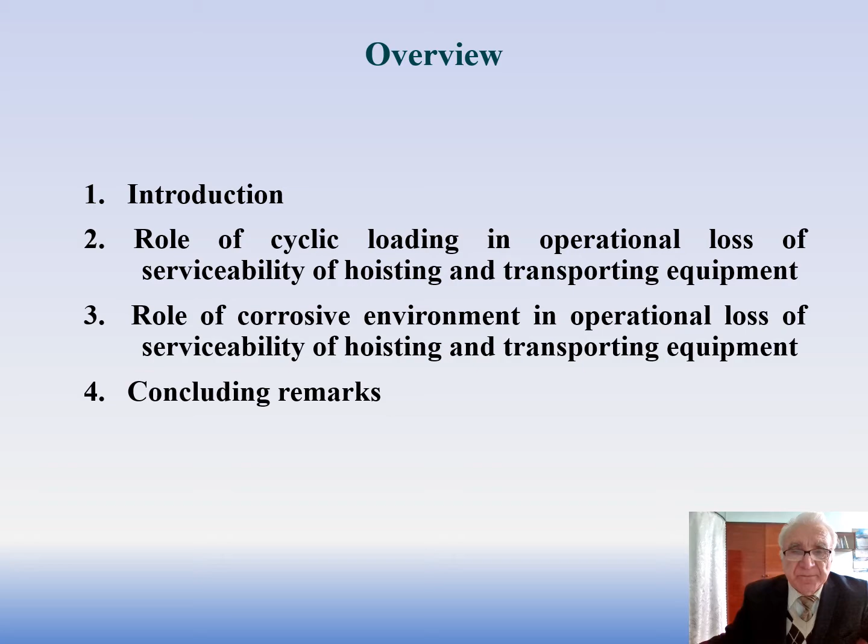Overview of the presentation. Introduction. Role of cyclic loading in operational loss of serviceability of hoisting and transporting equipment. Role of corrosive environment in operational loss of serviceability of hoisting and transporting equipment. And concluding.

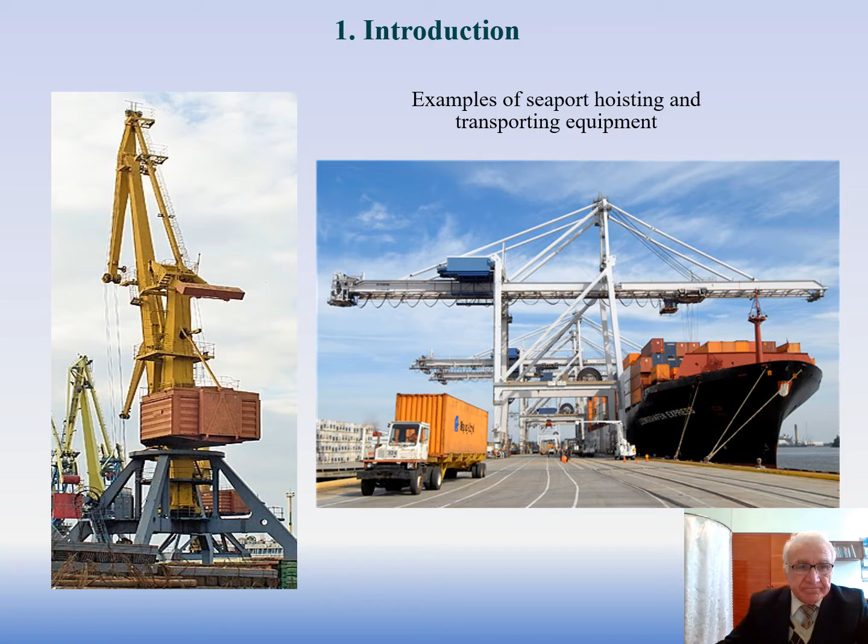Introduction. Hoisting and transporting equipment is an important component of seaport infrastructure. It should meet appropriate requirements for the mechanical properties of the metal, which ensure their serviceability during a planned long-term operation under combined action of cyclic operational stresses and corrosive marine environments. It should be taken into account that the mechanical properties of load-bearing structures of handling equipment are subjected to operational degradation.

Its peculiarity consists in a sharp decrease in the resistance to brittle fracture, and this increases the risk of abrupt rupture of metal structures, including hoisting and transporting equipment, as is shown on this slide. In this paper, the manifestation of two important factors in the operational degradation of carbon steels, namely cyclic loading and marine atmosphere, have been analyzed.

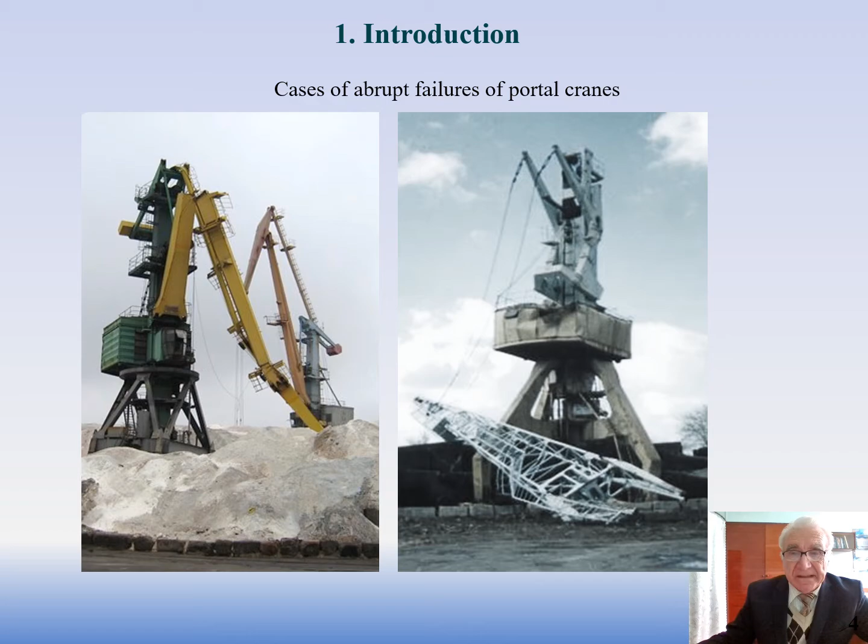Role of cyclic loading in operational loss of serviceability of hoisting and transporting equipment. The stress ranges of certain units of the portal crane, operated for 33 years, had been analyzed. The measurements were done on the surface of the crane under conditions that corresponded to its normal operation using the strain gauge method.

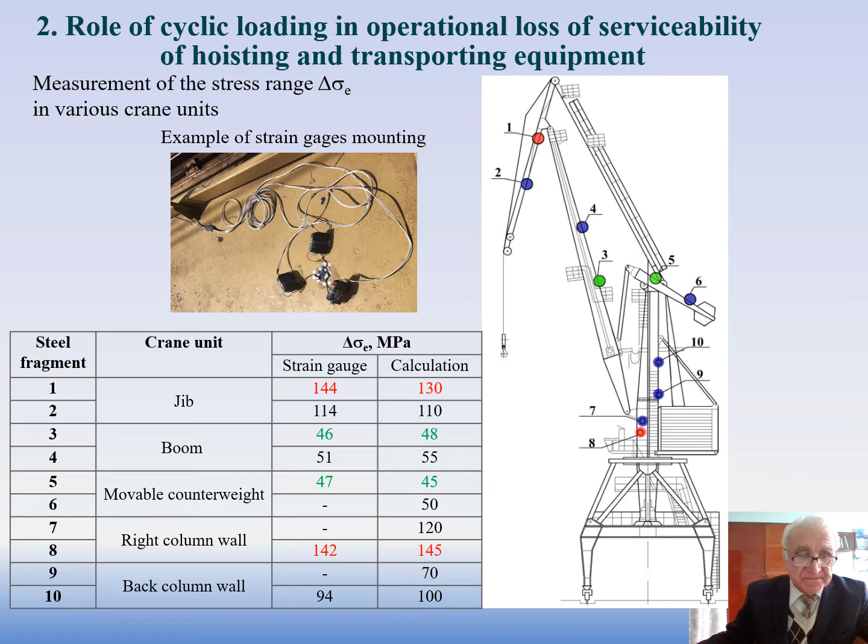This made it possible to evaluate cyclic loading, stress, and most importantly, the difference in their levels for the test crane units. As expected, the value of cyclic stresses to which the crane components were subjected contributed significantly to the intensity of the degradation process in them. A comparative assessment of in-service stresses and the corresponding resistance to brittle fracture for each unit is presented in this table.

A relationship between the obtained values of stress range and impact toughness has been established. The higher the stress level, the lower the resistance to brittle fracture. In addition, it was shown that delamination along the rolling direction accompanies the drop in impact toughness. This results in different KCV values for specimens cut longitudinally and transversally to the rolling direction.

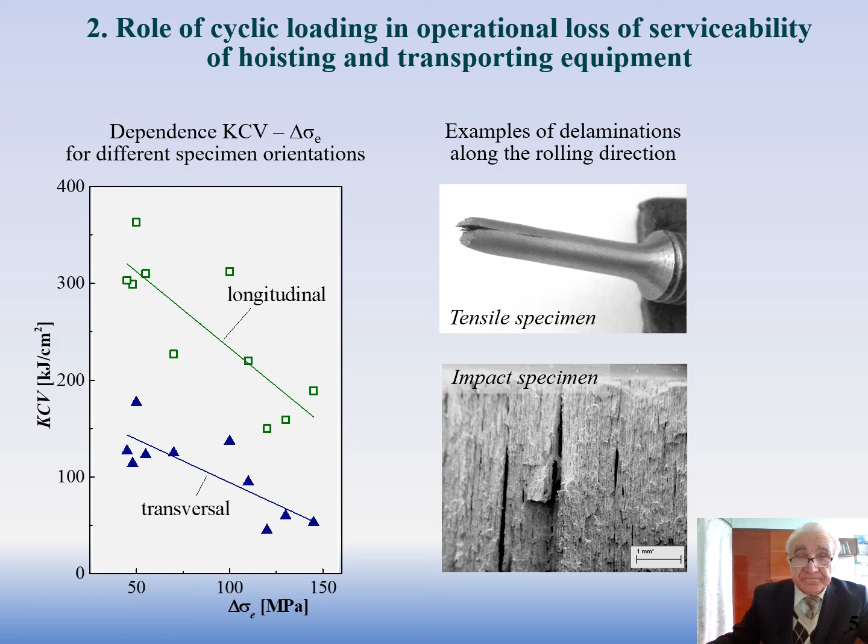A big difference was revealed between impact strengths of specimens cut in different directions concerning the rolling direction. Impact strength level of transversal specimens was essentially lower in comparison with longitudinal specimens. And this difference was more significant for more stressed steel, that means a more degraded state.

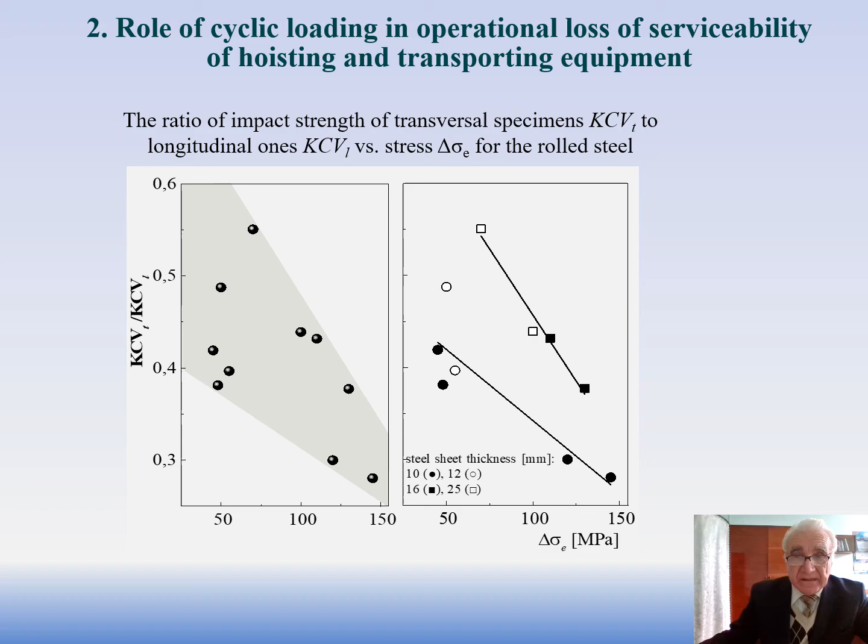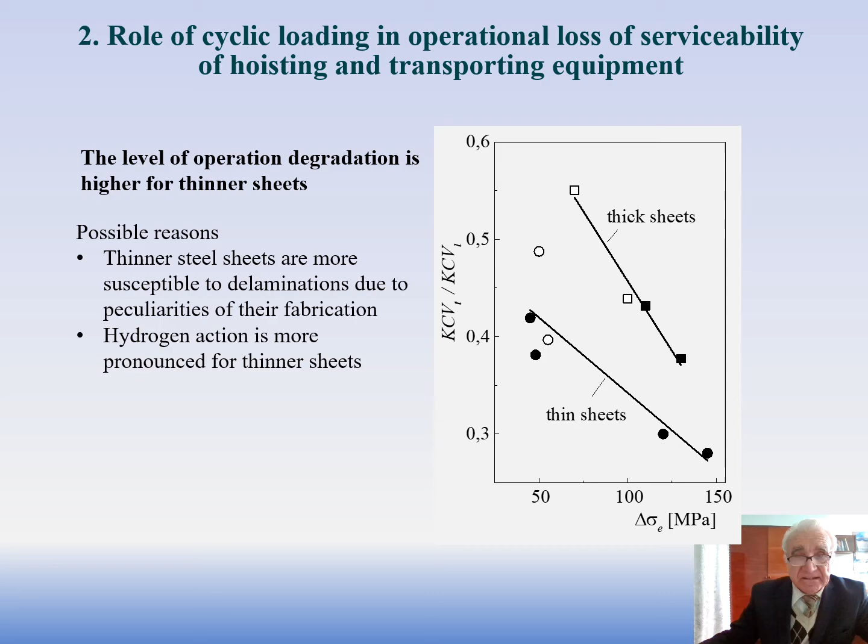Role of corrosive environment in operational loss of serviceability of hoisting and transporting equipment. One of the consequences of the operational degradation of port metal structures is the intensification of the corrosion process confirmed by electrochemical studies. The long-term operated steel corrodes faster than as-received or normalized one. This means that the current technical state of a metal under operation should be also taken into account when predicting corrosion losses and metal thinning.

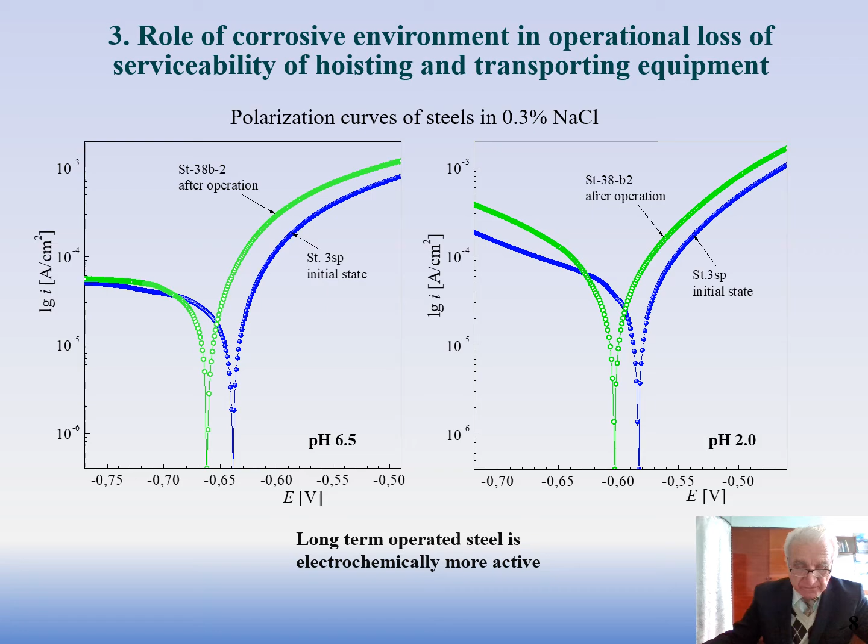A high corrosion rate of the metal in the marine environment with hydrogenation capability implies the intensification of the degradation process, especially in rolled steel susceptibility to hydrogen embrittlement. Based on this, it is suggested using such a relationship for elaborating a non-destructive method to assess the current metal state.

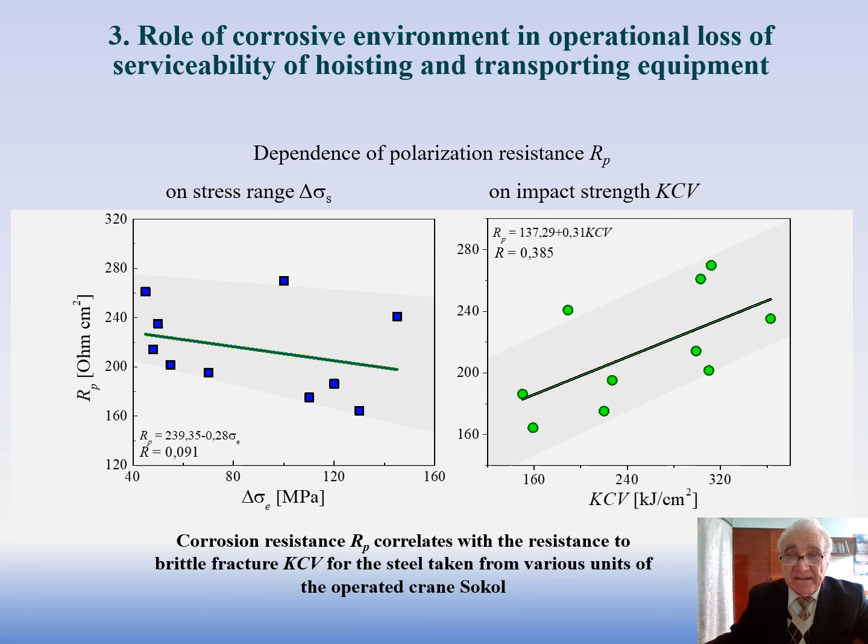And finally, remarks. Conventional approaches are unsuitable for substantiating the safe extended operation of steel structures of seaport hoisting and transporting equipment, since they do not take into account the degradation of the mechanical properties of metal, first of all, characteristics of brittle fracture resistance in the course of its operation.

The crucial factors in the operational loss of serviceability of handling metal structures, namely operational stresses and ambient environment, are considered. Firstly, intensive operational cyclic loading significantly varies for different structure units, thus leading to different levels of their operational degradation. And secondly, the marine environment affects the serviceability of seaport structures not only because of the risk of corrosion damage, but having hydrogenation capability intensifies the operational degradation of the metal and, on the other hand, facilitates fatigue crack growth by the hydrogen embrittlement mechanism.